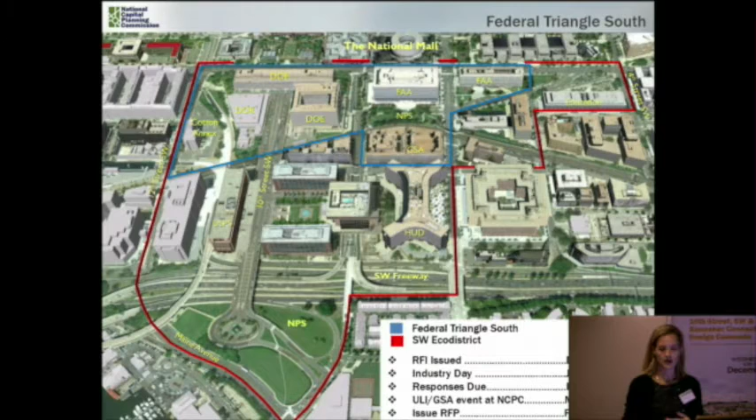Probably the big thing going on in the Eco District is GSA's work with Federal Triangle South. You may recall last December they issued the request for information looking at the land outlined in blue here, which is a good portion of the Southwest Eco District boundary outlined in red. They issued that RFI looking to redevelop or revitalize their federal property to meet their needs and their client agency needs, and also to meet some objectives of the Southwest Eco District Plan. We're anxiously awaiting the release of that RFP, which should be very soon now.

That's going to be a really important first step for the redevelopment of this area. We've been working closely with the DC Office of Planning and with GSA on the new zoning for the area defined by Federal Triangle South. That zoning has been proposed and is available for comment. I won't go into details, but what it does right now is look to figure out how to incentivize new streets in the area and residential development, both of which are very important to achieving the Southwest Eco District vision.

Then we have the Maryland Avenue Southwest Transportation Study. Shannon Hake is here if you have any specific questions for her, the project manager at DDOT. Basically, that's the study to look at the technical and financial feasibility of decking over Maryland Avenue. Right now we've had a bunch of interagency meetings, and there's been some public meetings, with another one coming up soon. They're looking at the alternatives to the small area plan right now and the traffic analysis, so more of that to come soon.

I want to mention the stormwater infrastructure study. Many of you might recall that we proposed a district water system for 10th Street and the parcels along it. We received a lot of great feedback on that proposal, people are very supportive of this idea, and what we wanted to do was take it a little further and study the technical and financial feasibility of actually making this happen. That study will be available hopefully by the end of this year on NCPC's website.

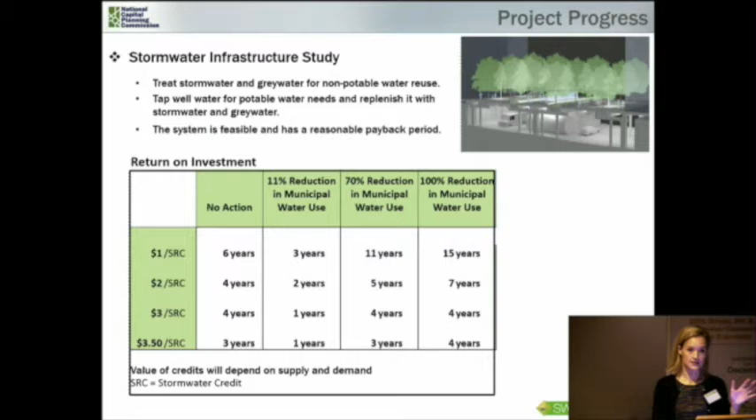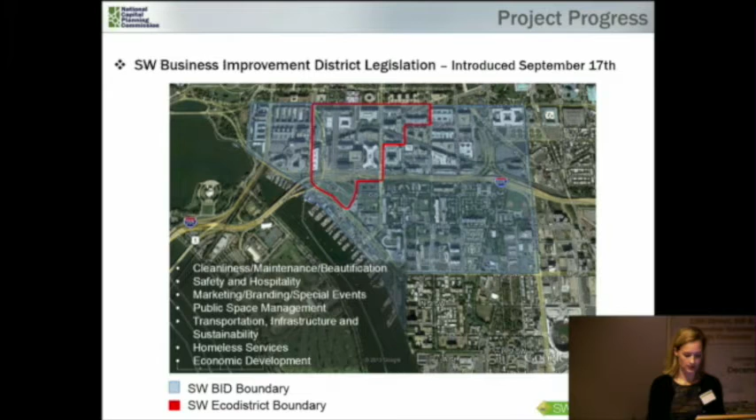They've been very supportive of this project and the entire Southwest Eco District plan, but are particularly interested in 10th Street and this interim connection at Banneker, and really starting to talk about some of the short-term improvements we can do on 10th Street. So we're very happy to have them involved, and couldn't be happier that they're going to be up and running soon.

Throughout this time, we've also been working closely with the Smithsonian, who is also working on a master plan for the southern portion of their property along the National Mall. This is really important for the connection at 10th Street and Independence. What they do at that intersection and on their property, and how that translates to moving across into the 10th Street corridor, is very important. So we'll be working with them throughout this upcoming year, which is very exciting.

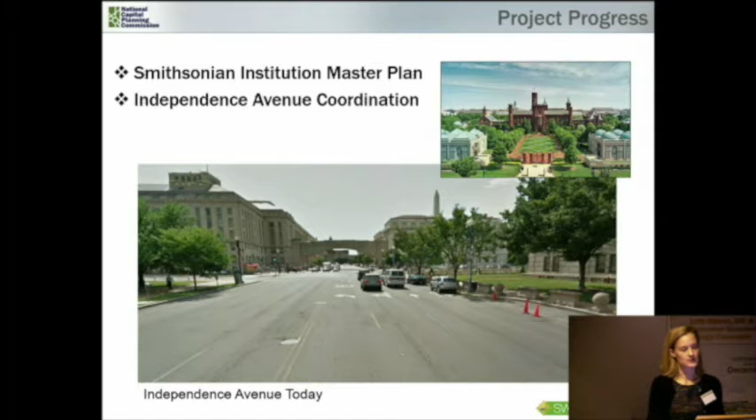As Marcel mentioned, we still continue to have very strong interest in new memorials and museums, such as the Benjamin Banneker Memorial and the American People's Museum, locating within the 10th Street corridor and at Banneker itself. So we were hopeful that we will see some sort of commemoration and new museums in this area as well in the near future.

So that brings me to where we are today. We're presenting these concepts. We have, since the last public meeting in May, been to CFA twice. We were at NCPC, and then we've pulled together our working group in the Southwest Eco District Task Force to review all of this work. We will be taking all of this to the National Capital Planning Commission as a concept in January, at the January Commission meeting. Then the two projects sort of diverge a little bit.

The 10th Street work will be put on hold until we can start working with the BID to do short-term improvements, and then the long-term improvements will happen as major redevelopment happens along 10th Street. But it's really important to have a concept in place to define not only the right-of-way for 10th Street as these properties potentially redevelop, but also to make sure that as they're redeveloping over a period of time, we're all trying to redevelop towards the same vision. So we will place that on hold for a little while until the big properties redevelop.

And then with Banneker, we will be taking that concept and handing it over to the National Park Service, who will then bring it through the actual design and review process in NEPA. That project is part of P.N. Hoffman's requirement for the wharf development project, and so that project does have funding, and we're really excited to see that come to fruition, and I know that the National Park Service is too.

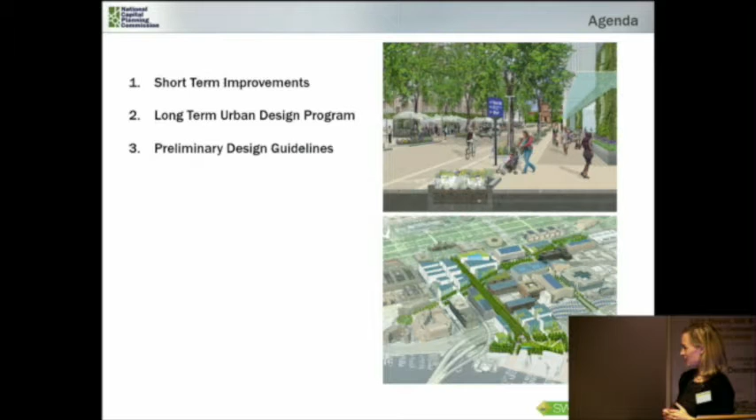So with that, I'd like to bring up Otto Condon with ZGF to talk about the design. Thanks, Diane. Good evening.

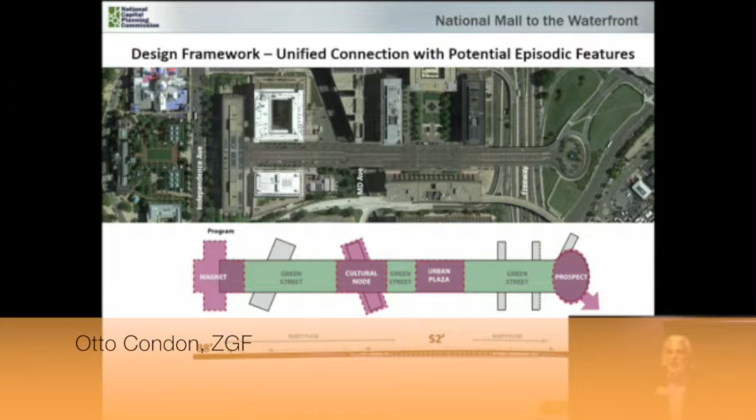So I first want to talk about the short-term improvements. If you were here at the last public meeting in May, we identified a framework, and we've really taken the feedback to develop a more refined programmatic concept. As Diane mentioned, the idea was really to come up with the framework for how all the development and all the various stakeholders can start to move both designs forward.

The design framework itself: we looked at 10th Street as a real unified connection with potential episodic features, what we call the magnet at Smithsonian, because we really need to attract people to come down 10th Street. There's the opportunity for Maryland Avenue to take on a more civic role, and then there could be a cultural node at that intersection. L'Enfant Plaza itself is really at the peak of 10th Street, which has about a 14-foot rise, and it peaks at L'Enfant Plaza and then goes back down to the river. That's a real opportunity for an urban plaza. Then moving down towards Banneker, which is really the prospect to look over the river.

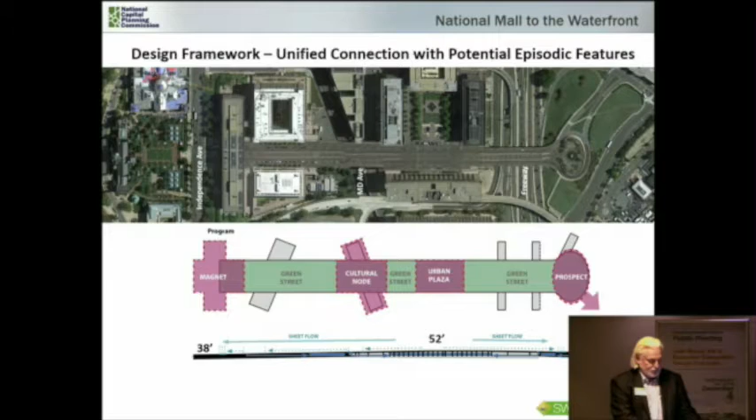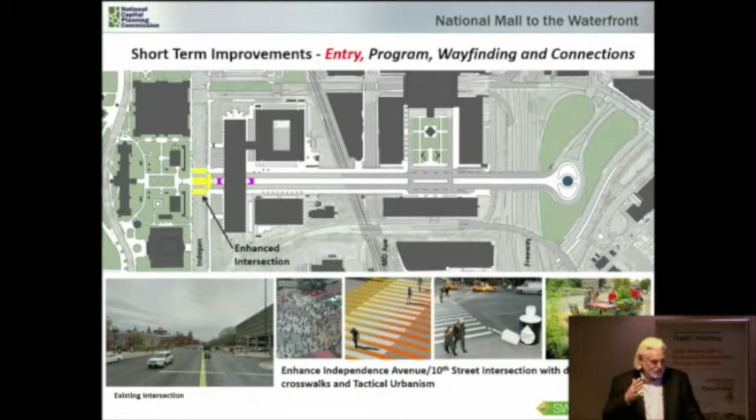In terms of short-term improvements, we wanted to break out the idea of entry and program, and then wayfinding and connection. The first thing for the entry is, in the short term, the intersection with and across the Smithsonian Garden. It's pretty much unidentifiable now, and with some simple tactical urbanism strategies, we could create more of an entry and gateway at that location, so people get a sense that the mall doesn't end at Independence.

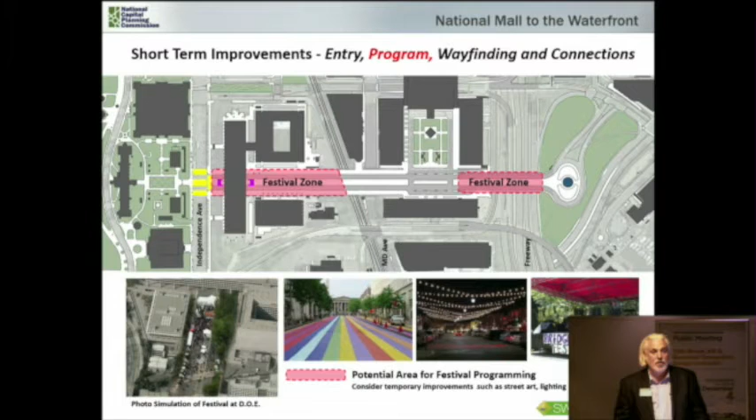We've been talking with the organizers of the BID, and if there's a way to expedite the process, it might be a way to move it forward and really start to create the energy for the area. With that, there could also be additional improvements like temporary art, lighting, and things such as stages.

In terms of wayfinding and connections, with the current configuration, there need to be improvements to the crosswalks, not only at Independence, but also at L'Enfant Plaza, to make that transition to the bridge structure, since there are really no sidewalks over the freeway.

And then to get down to the waterfront, to make both the future connection toward the Fish Market and also to 9th Street. We also think, from a traffic management and pedestrian safety standpoint, these little purple areas show opportunities for reconfiguring some of the streets, making them behave better with simple curb line improvements and enhanced intersections.

In terms of wayfinding, there's an opportunity for some innovative lighting and more innovative signage, just to get people to know that if you're at the Smithsonian, things don't end at Independence, and really start to draw people down.

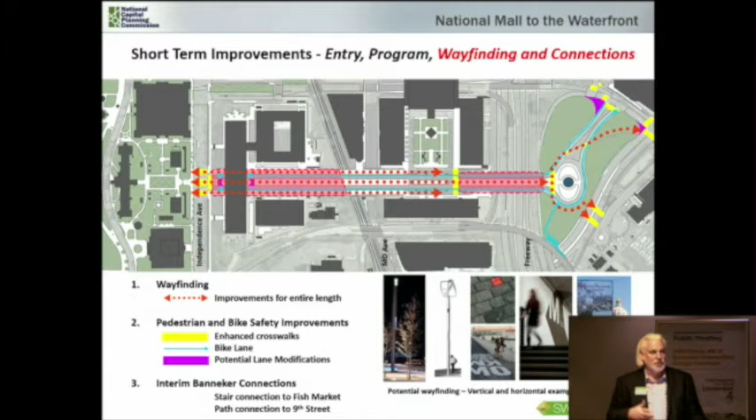So as part of the scope, the idea was to identify things that can be done quicker and easier and don't require large investments. And once, as Diane mentioned, the BID is established, maybe that's something that could start to occur in the more immediate future, maybe even 2014.

So the next is the interim connection for Banneker. If any of you were at the meeting, you'll recall we looked earlier at how to get down from... does this actually show up there? Oh, it does, okay. 10th Street, to make the connection across to the future waterfront development.

As part of the Southwest Ecodistrict Plan, there's a 100-foot corridor that is really the view corridor from Banneker down to the water. We were looking at how to fit the circulation improvements, the stairs and potential ramp, within that area. To put the stairs and ramp there, because of the grades, it didn't fit.

This scheme was trying to put the stairs in that zone and use the area to the west for the ramps. I think generally the feedback from the public meeting, from CFA and NCPC, was that this was trying to put too much stuff in a narrow corridor, and it didn't really do justice to the connection.

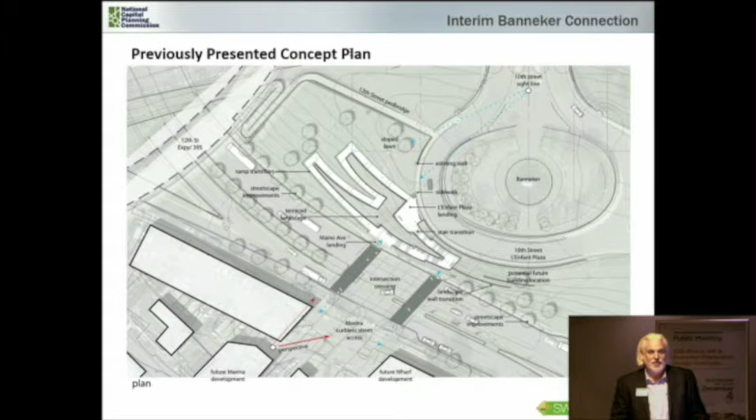This illustration actually starts to show that there's just a lot of additional walls being created—maybe more of a visual barrier.

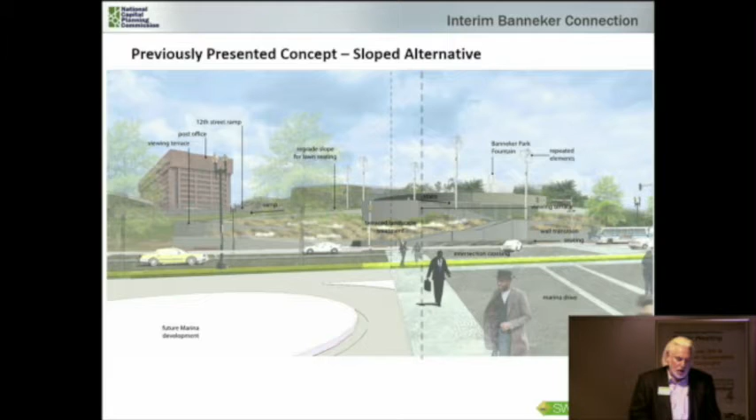So with all that feedback, we started to look at maybe there's a way to incorporate the stairs differently. The actual feedback we got was: don't try to put everything in that one zone.

Maybe we should look at the accessible route going down to 9th Street with some landscape improvements, as shown in this diagram, and really try to make the jumping-off point for the stairs at that intersection, using the existing break where the bike ramp is, then create a more gradual transition for the stairs. This was also based on understanding whether Banneker is a historic structure, since the previous scheme required more modifications to the walls, which would require more review of the historic nature.

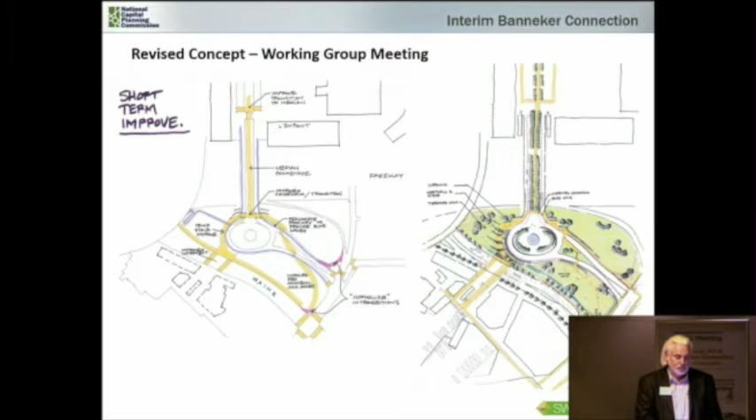This one is a little more sensitive to its current status until it's figured out. Here's a close-up showing if you're coming down the center median, improved crosswalks. We've widened the edges and made some transition plazas so it accommodates accessibility and curb ramps. A little more seating areas along that edge, and brought the stair entry off the existing where the bike path comes in, using more of a terraced step approach that is radial with Banneker, pulled away so we had enough area to create a few

Transition zones to accommodate the grades. On this side, these are the existing crosswalks, and with the slopes, in order to get 5% or less so that it meets ADA requirements, we think it's an opportunity to provide both the ADA path on this side, and an enhanced connection with some landscaping along the path. Ultimately, this whole site could be redeveloped in the long term with museums and such, and at that point the buildings can be used to accommodate some of the vertical circulation.

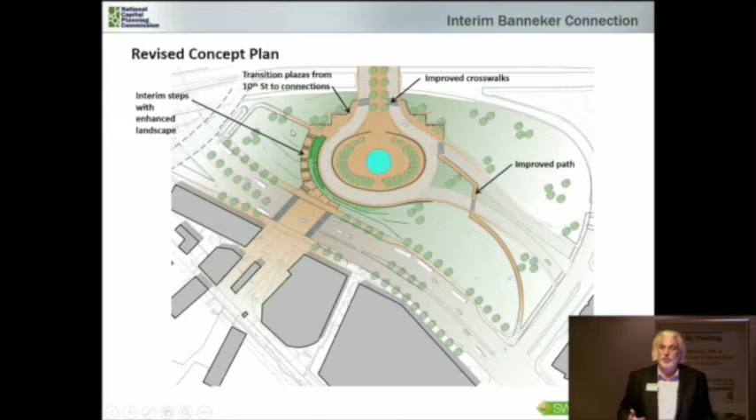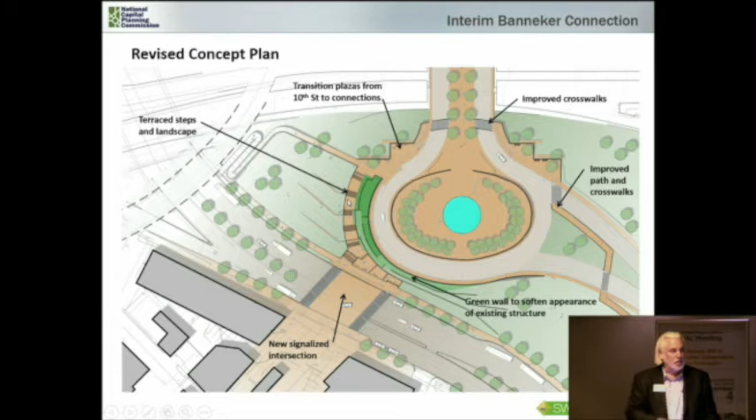This is just a close-up showing the new intersection being built as part of the waterfront development, and the steps with some of the grades tied back, or the retaining walls tied back into the grades, to create some landscape terraces and a more generous approach for the stairs. Then in perspective, this is an opportunity, by stretching the stairs out, to really incorporate the landscape more. We still need to do a lot of work on understanding some of the structure of this wall.

This is what I'll call the Pringle wall, which is next to the Banneker fountain—it's kind of shaped like a Pringle. Then this wall is the wall that's the road, and we still need to better understand the structure and how much we can pull some of the soil away. But it's an opportunity for some green walls, and a few intermittent walls for stepping up the landscape.

As part of the next and final wrap-up, some of the comments we received were about how we make these walls a little more generous in the curve so that it's a little more sympathetic to Banneker itself. Here are the stairs which come down to the new intersection, and because of the grades, it's an opportunity to create some terracing and maybe even a temporary sculpture garden to start to activate the space.

This just shows some images of how we can really soften the walls up with green wall technology.

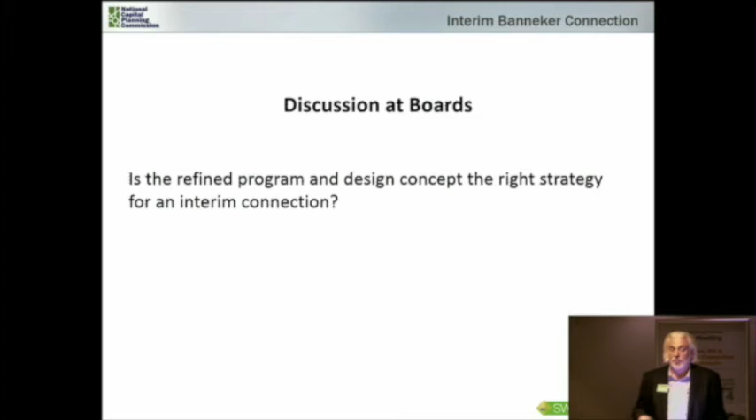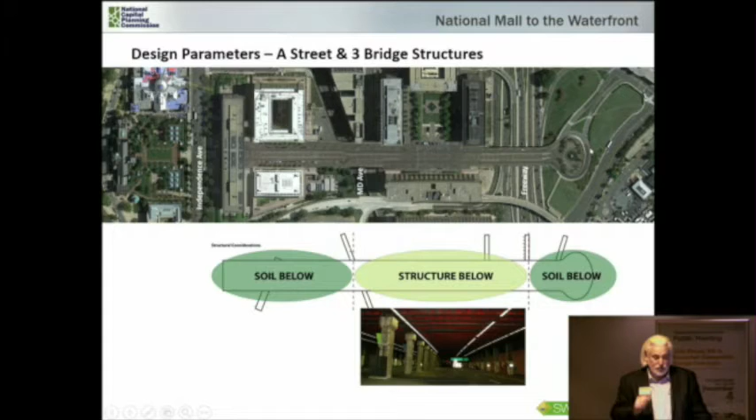So as part of our study, we really wanted to understand—the drive was to make a green connection. Putting trees on a bridge with the structure can get complicated in terms of making sure there's enough soil for the trees. So that was one of the first things we showed previously, making sure the programmatic concept was achievable and feasible. This diagram starts to show that the bridge actually changes span direction, so trying to get some sort of rhythm within the various structures is a challenge, but we think it's doable.

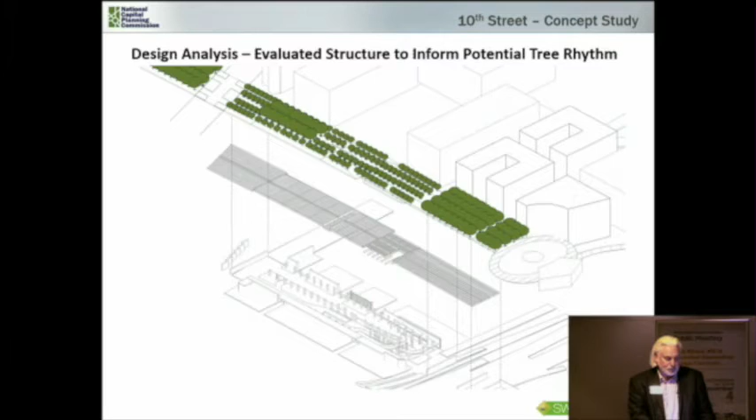Last time we presented 3 design approaches, and it was really to get feedback on what are the priorities for all the agencies, the stakeholders, the public, in terms of the feel of the street.

We had the hardscape approach, which is really probably closest to the current experience, but with some trees. Then the softscape approach, which is more of a linear garden, maybe more reflective of the mall. And finally the waterscape, which was part of our water study, how can we collect the water, how do we use it, how do we clean it, how does it enhance the environment.

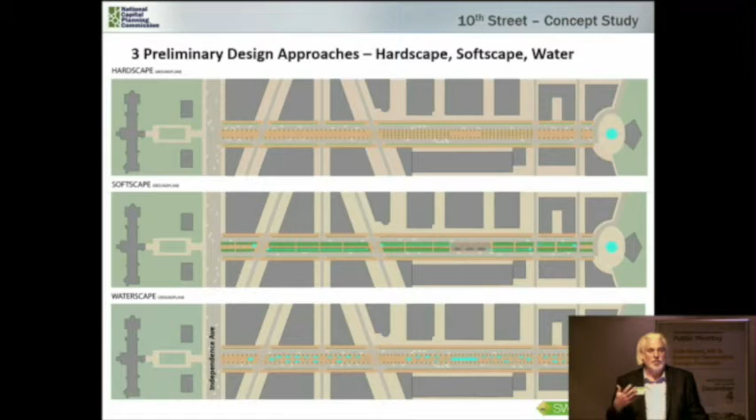So these were the realm of options. And as Diane mentioned, we went through several meetings and got some really great feedback and an understanding of the priorities in order to move this forward to a framework that can be further carried as all the projects and the bid starts, and the agencies help guide the more detailed design.

In terms of the right-of-way, since that's one of the most critical things for the Federal Triangle South RFP, the current right-of-way is 150. We looked at narrowing it, expanding it, but the 150 actually seemed like the right dimension. The current street configuration has a 29-foot sidewalk, 39-foot median, and a 29-foot sidewalk on the other side, with roads that are 26.5 feet.

If you recall, in the Southwest study, we did look at alternative configurations, whether it was a median down the middle, the road down the middle, or asymmetric. And again, from what's the best idea for the street that's flexible and actually achievable, we decided that keeping the center median was the best idea.

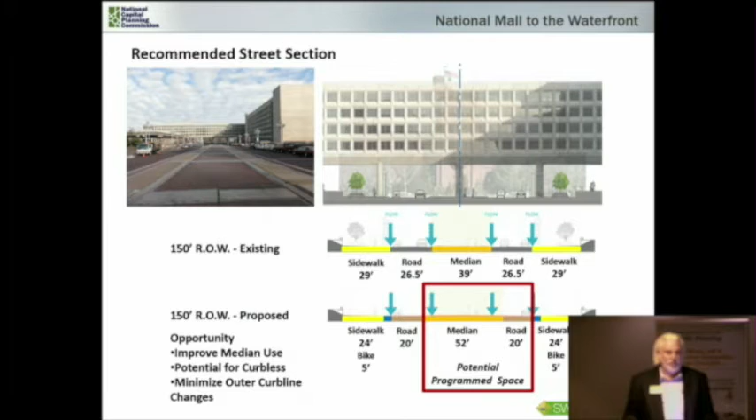It was an opportunity for making a curbless environment. We put the asphalt on a diet and turned it into a 20-foot road, which would accommodate 1 travel lane and 8-foot parking, which gave us a median width of 52 feet versus 39, which actually gives you room for landscape and room for programming.

And the 20-foot roadway gives you an opportunity, if you do a festival, to actually turn 1 parking lane and 1 travel lane into 2 travel lanes at key times.

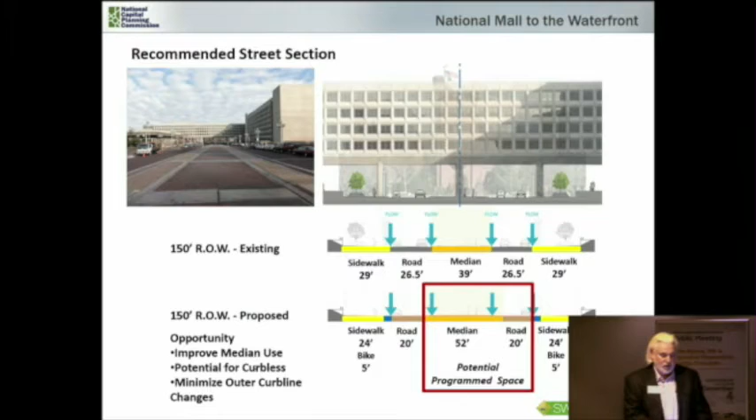So there's an opportunity for occupying the street and really bringing people the whole length.

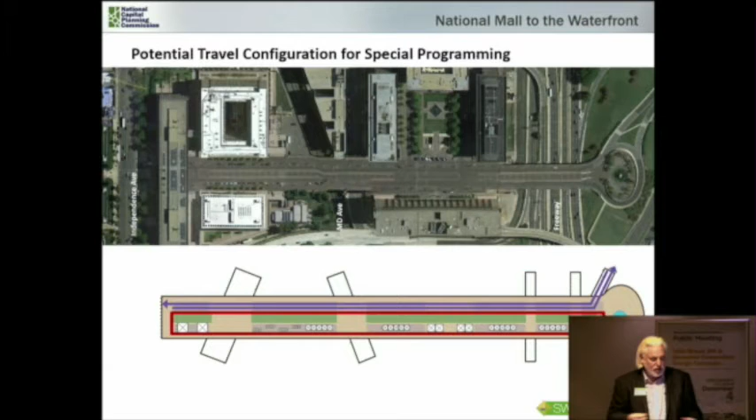In terms of how do we maximize the tree canopy, there was no way to actually have a full tree canopy along the whole length because of the bridge structures. So we're looking at where there's dirt, let's utilize the dirt to get the maximum tree growth.

Also an opportunity for a cistern for collecting the stormwater, which could be used for building gray water systems, irrigation.

In terms of the stormwater plan, the idea of these cisterns, our initial findings are a size that's slightly less than the cisterns that were put in the mall. So we think it's actually very achievable and feasible for the size of cisterns.

In the areas of the bridge structure where there's an opportunity, because there's nothing happening basically below that area, we could cut into the bridge spans and create areas for larger trees and also a cistern.

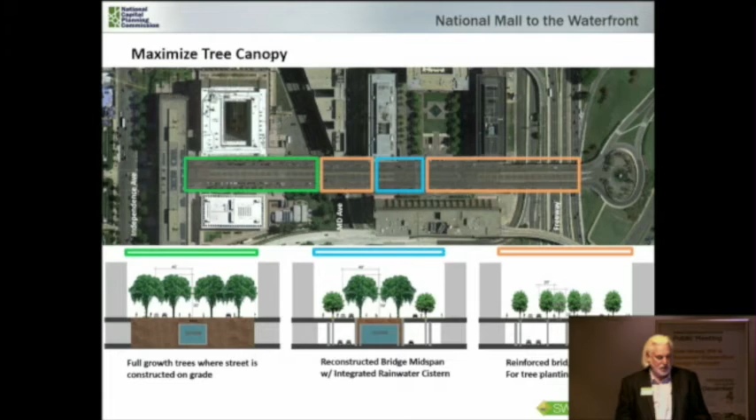We think there's an opportunity for doing heat exchange, basically similar to geothermal, using that heat, the mass of the water, for buildings. In terms of quantities, the water on the street might be about 100,000 gallons.

The cistern might be in the 500,000 to 700,000 gallon range, which is comparable to the mall size. So that's the kind of program we're looking at and that we've been pricing out as part of the stormwater study and trying to illustrate in these concepts.

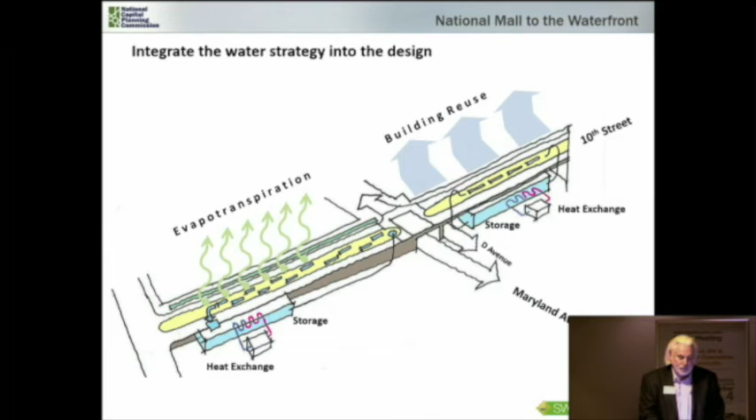After we presented those three approaches, a lot of the feedback we got was that the program was understood, but let's talk now about the experience. So we started calling it more of an urban garden promenade, that it can change experience, build upon what's underneath, and reflect the structure, but also create unique areas.

We should take advantage of the grade up to the plaza. As a diagram, coming from the Smithsonian up to Maryland, it's a little more of a passive green because we can get more landscape there. That's more open as a feature near L'Enfant. Then the landscape water furnishings can create more of a cascade, a little more organic and less rigorous as it connects down to the waterfront, creating the final prospect down to the river.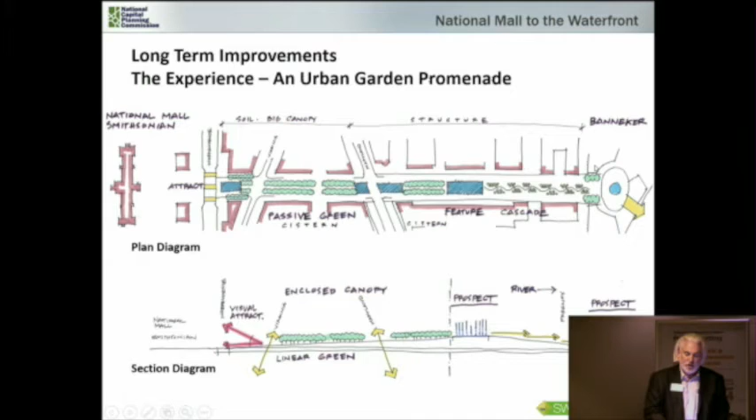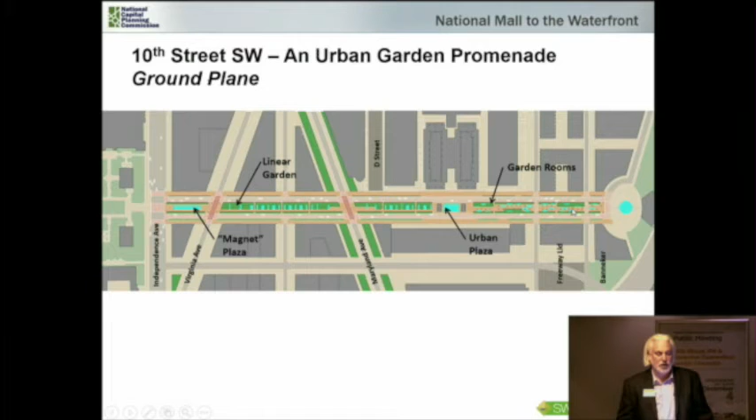In the ground plane diagram, it's a little more open at Independence, with opportunity for a water feature, then the Magnet Plaza, a little more green with some integrated water toward Maryland, opening up more at the Urban Plaza, and then a bit more of a staccato approach. We'll still maintain some of the rhythm of the trees so you get that sense, but it's a little more playful as you move down toward the river.

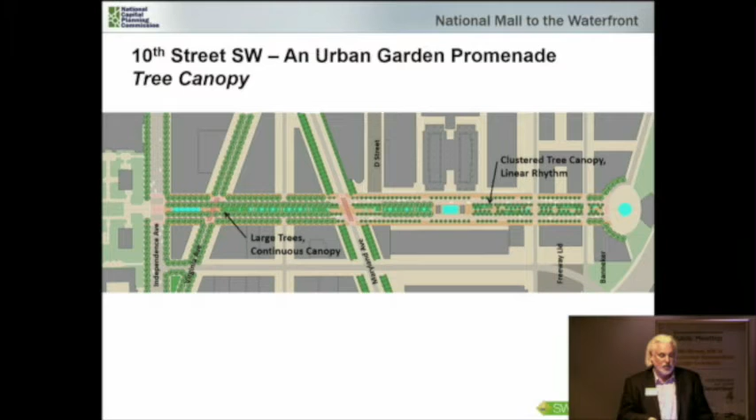This gives a sense of the rhythm of the trees and the general size we think we might be able to achieve in terms of overall canopy. It still maintains the rhythm, but provides opportunities for bringing sun where you want sun, while also providing shade.

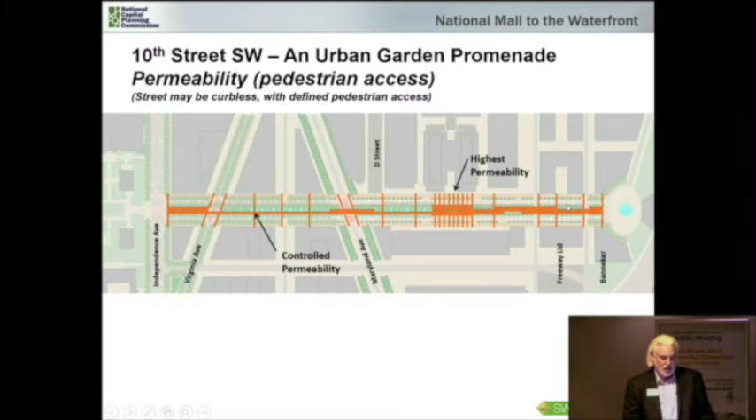In terms of permeability for the length of the area, at Independence this is probably most like an urban plaza complementing the garden. It may be a bit more mid-block with crosswalks up to Maryland. When you get to the urban plaza, it's as permeable as possible, a curbless environment. And there may be more opportunities for programming down over the freeway as the freeway gets redeveloped.

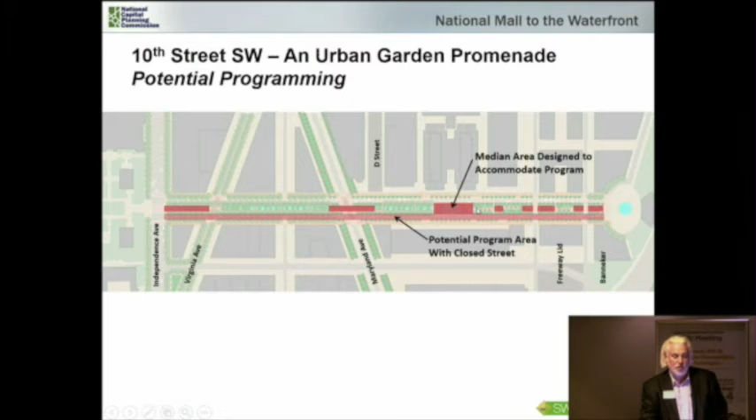In terms of programming, it reflects the layout with the possibility to use the whole street, whether this side or the other, and making sure there are opportunities for programming larger areas at each of the nodes.

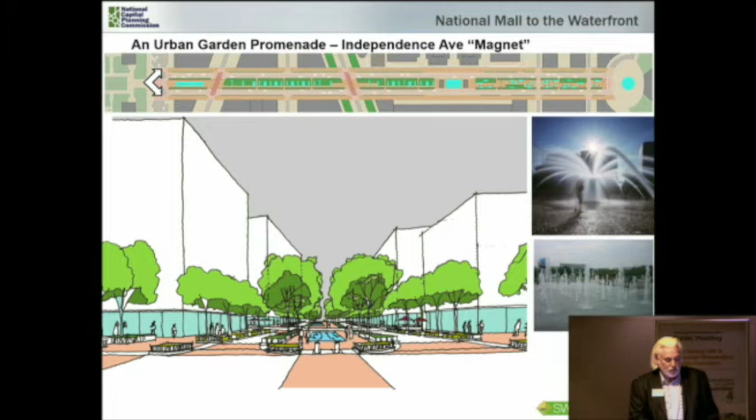In terms of walking down the street, here's what it might look like coming in from Independence, crossing the garden at the Smithsonian. The area right in the median is an opportunity for a water feature that could be turned on and off. Here we're showing some vertical opportunities, but with programming it could really start to draw people in.

For the linear garden, we looked at an asymmetric approach to create a little more green on the east side of the street for better sun, shading, and opportunities for incorporating some water features. With the grades, this may be a bit more extreme, but Meridian Hill Park is an example, and here's Millennium Park in Chicago. We think there are opportunities to really use water as an architectural landscape feature to complement the space, while still creating a little vertical element too.

As we move forward, we're going to write up guidelines and design parameters for the framework, so that as the design moves forward it can be developed to a level of quality and detail to be considered for the whole street.

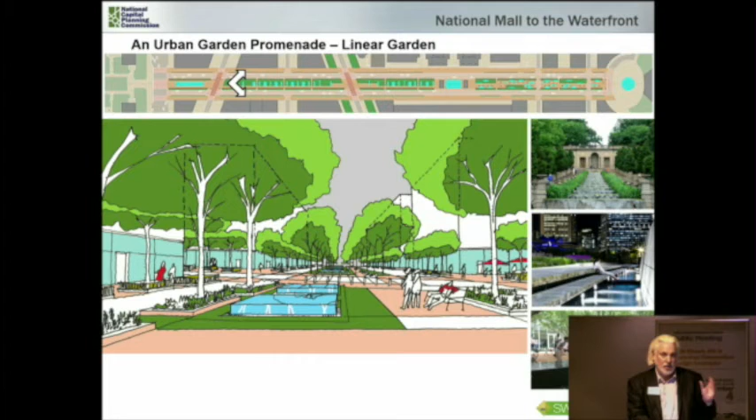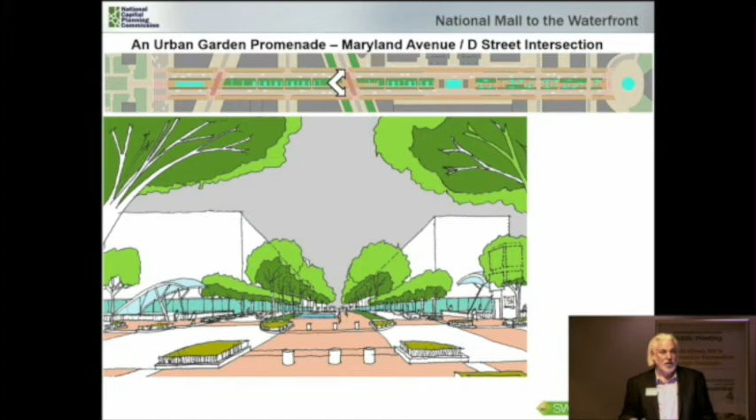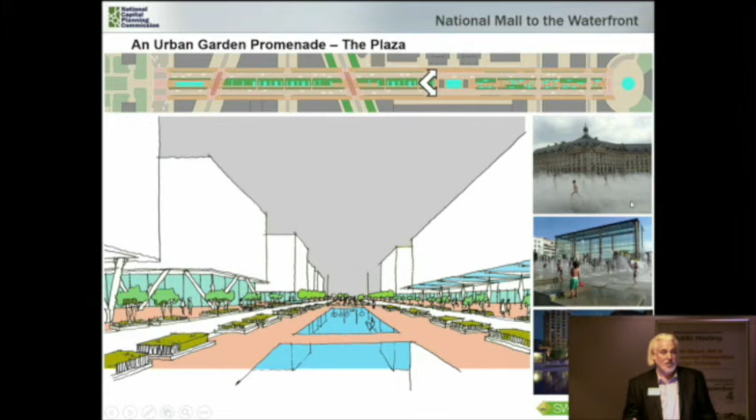At Maryland Avenue, part of the idea is that it should be open, reinforcing the civic nature of Maryland Avenue, and also because there should be opportunities for vertical connections down to D Street, since that's one of the ways to get to the metro on the east side of 10th Street. The plaza itself should be more open, with opportunities for enlivening the edge of the post office building with some structures. With the potential future development at L'Enfant Plaza, the plaza itself should be of a quality that makes it interactive in terms of touching the water.

The ideas themselves, we haven't developed as much, we looked at the 150-foot dimension, actually a little bit more. At that scale, there's an opportunity to do a framed water feature in the median, similar to Millennium Park, or maybe more of an architectural feature in the median. This is actually a park in Portland that we designed with Olin, which has both a fountain and some architectural features.

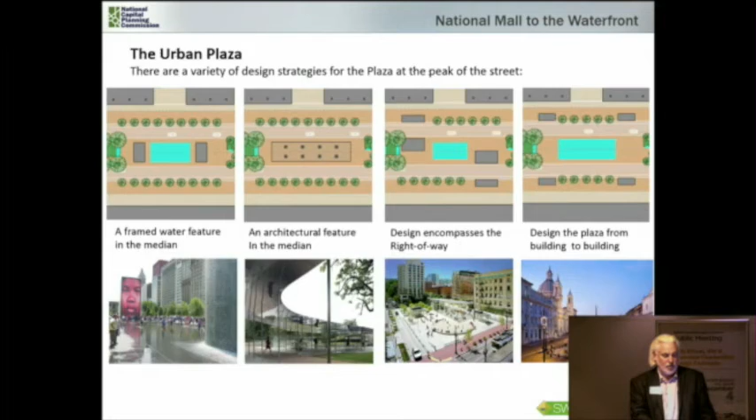Finally, as you're moving down the linear garden aspect between the plaza and the river, there are opportunities to be a little bit more informal—raised planters because of the bridge, seating, water features, smaller trees but clustered to create a little bit more variety. This starts to show some actual water features.

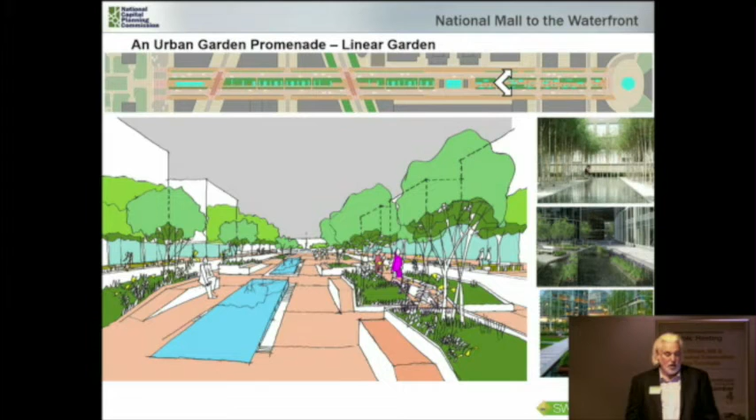These are down by Washington Circle, right by GW, just built. They're actually part of an apartment building, but they would function structurally the same way. They have the water feature and a cistern below, and it recirculates the water to keep it active and not stagnant. I think that's an opportunity where your areas are limited because you're over the circulation of the lower street.

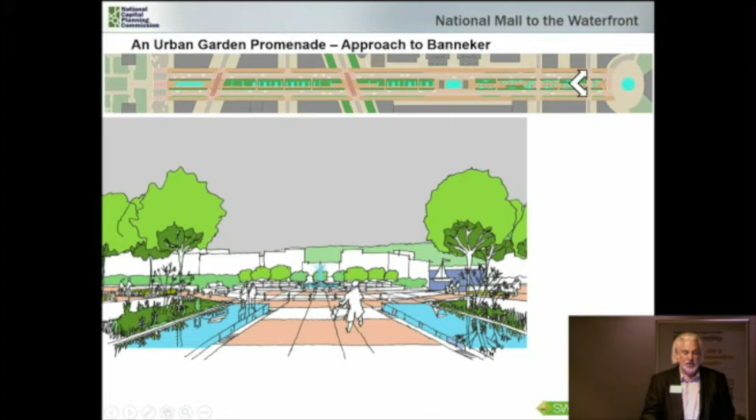And then finally, getting to the approach to Banneker. Here we're showing pretty much where it is now, because there's still a lot to be worked out with what the future of Banneker might be. In terms of long term, we still think it's going to be developed in phases, with Federal Triangle South being one phase. When Maryland is capped, that's going to be a project in itself. L'Enfant Plaza is an opportunity for the private development adjacent to it, and also how to activate the post office. The freeway, maybe long term, is when the freeway gets capped for some development. And then finally, Banneker.

So I think it's critical, and this is for your comments too—we're looking for a programmatic concept. We need to have it defined enough so that even though this is built in phases, it's a concept that's clear enough that when it's all said and done, it'll actually read as something that had a big idea behind it. It wasn't just—you don't walk down and go, oh yeah, this was the 70s, this was the 80s, well maybe 2020, maybe 2030, that sort of approach.

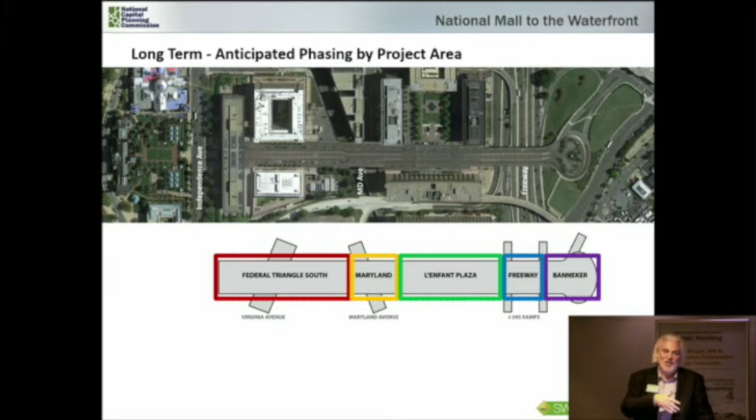So for the discussion, I guess we want to talk about: does this seem like the right framework for 10th Street in terms of the program and ideas, or is this the right approach in order to address both the short term and the long term?

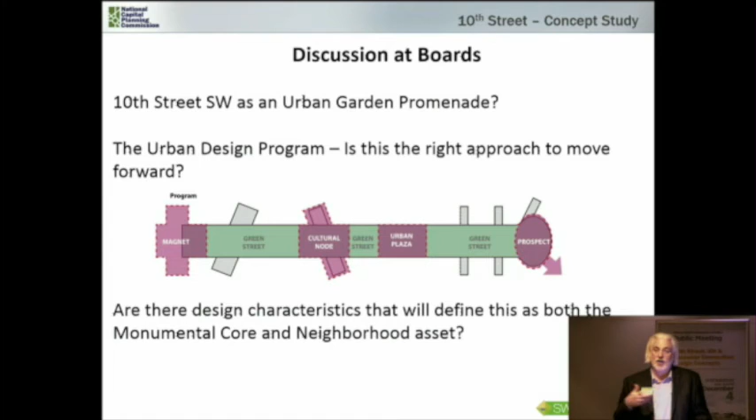One of the things we've had some discussion about is the design characteristics. Right now, 10th Street is a period piece with the circular globe lights—some people radically love them, and some people, I'd say, radically dislike them. That's just one example of how furnishings can create a strong identity. So what we'd like feedback on is not only the character of the street, but what its role is, both as a monumental core street and also a neighborhood amenity.

And with that, I'll turn it back to Diane.

Okay, so the last part of this evening's presentation, before I'll get to go talk over at the boards, is I wanted to just introduce you to what we are doing with regards to forwarding the Southwest Ecodistrict Plan beyond the design for 10th Street and Banneker. One of the action items in that plan was to synthesize the objectives and design strategies into a very cohesive document, which we're calling right now the design guidelines, so that they're all in one place—so when Federal Triangle South moves forward, you can look at them without reading about the background history and all the other stuff within the Southwest Ecodistrict Plan.

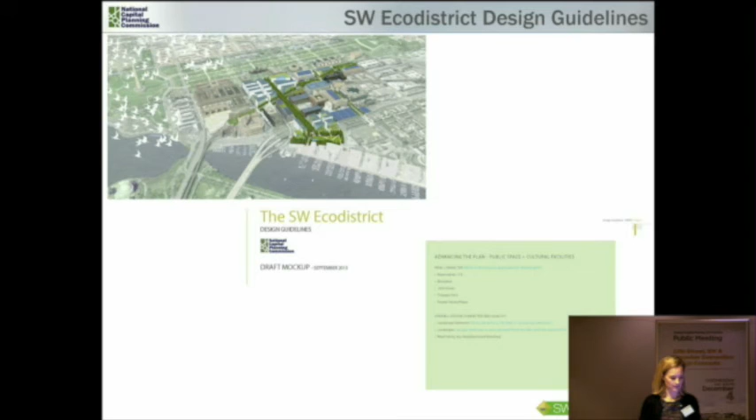We realized we missed some stuff when we did that plan, and this is an opportunity for us to advance some of our thinking. We're not doing a whole new plan, but there are a couple of key places I wanted to introduce you to. We don't have the answers right now, but we feel we can advance this to further define how we can bridge the national and the local city here.

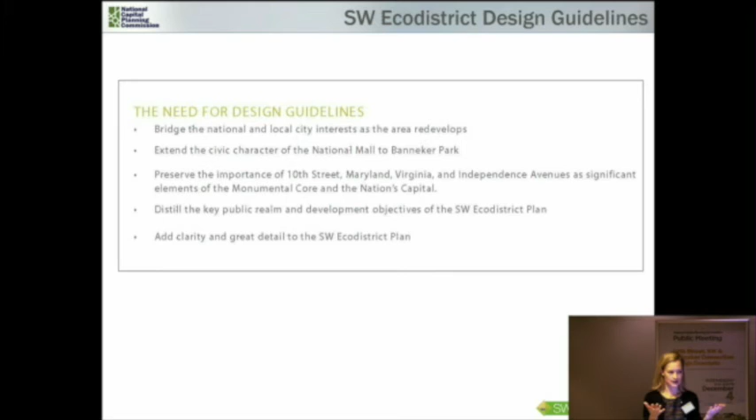As Marcel mentioned earlier, this is a really unique place with the monumental core and hopefully a very vibrant new neighborhood, probably more unique than any other place in the city. It really could be amazing. This won't be a regulatory document, just guidelines, but we think it will be very helpful, and it will build on a lot of the resources you see here. We'll have more opportunity to comment on them.

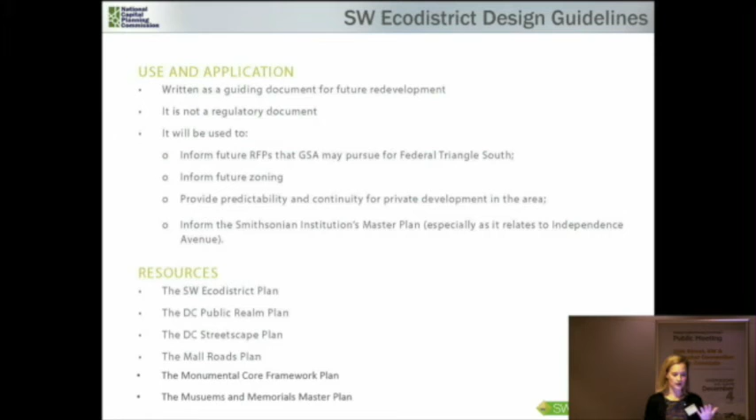Some of the things we're looking at are street classifications, building form and scale, park character and function, and the character of hardscape and landscape. I wanted to bring you up to speed because 10th Street is part of this, and certainly Independence Avenue as well, on what some of our initial thinking is. This is also important to how we comment on the new zoning for this area, which is open for public comment right now.

So actually, Otto and I are going to tag team this.

Right now it's a super block, and there's very minimal streets that aren't really defined. Part of the Southwest Ecodistrict Plan was to start to organize it, first by breaking up the super blocks, introducing new streets, and creating classifications by monumental, civic, or city.

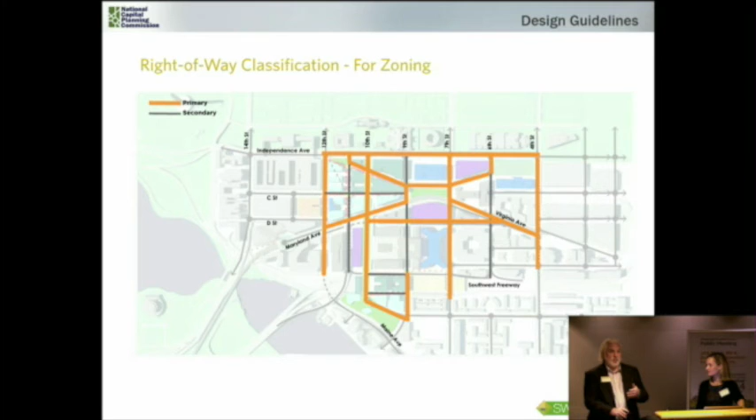This was a more functional approach, so it could be coordinated with the Office of Planning, Zoning, and the Department of Transportation's requirements for loading and such. This was really about identifying the primary streets, the most important streets where you want to walk, where the retail or active store frontage wants to be, versus the secondary streets, where you want your back-of-door stuff, loading for cars, garbage, and general loading.

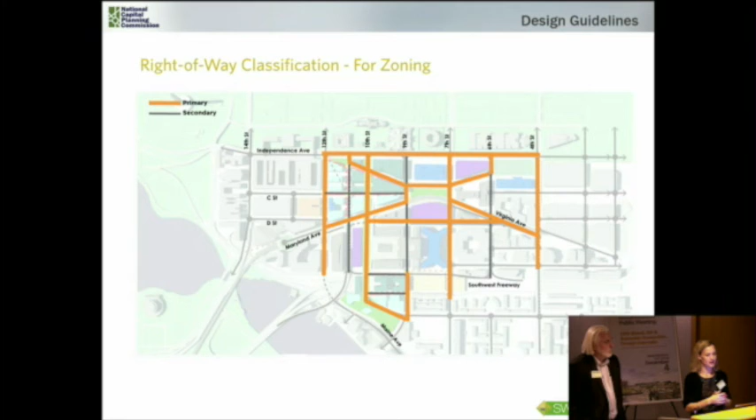We wanted to make a real simple diagram showing how to organize the streets, with the primary streets being Independence Avenue, Maryland Avenue, 10th Street, and Virginia Avenue. We also have handouts here when we finish, a matrix of street dimensions and the character of the streets, that you're more than welcome to take with you.

This diagram shows the primary streets where you want the active building frontage, which includes guidelines for what uses should be on the ground floor, how lobbies are oriented, how you may have displays or retail, and what the first floor height should be so you get a real sense of the frontage. Transparency, often you aim for about 75% transparency in the facade so it feels like you get eyes on the street. And then the building entries themselves.

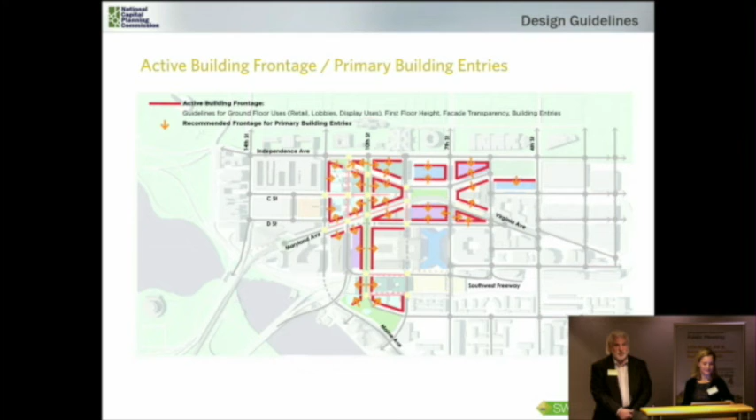So here, understanding the active building frontage is also the recommended frontage for primary building entries. The entry should be facing the parks, facing the grand streets, to help reinforce the character.

To complement that is the secondary frontage, where you would want to put the parking, the service, and the loading access. If you think of the super blocks, what you're doing is breaking them up, creating secondary streets, and funneling the loading and access into those secondary streets.

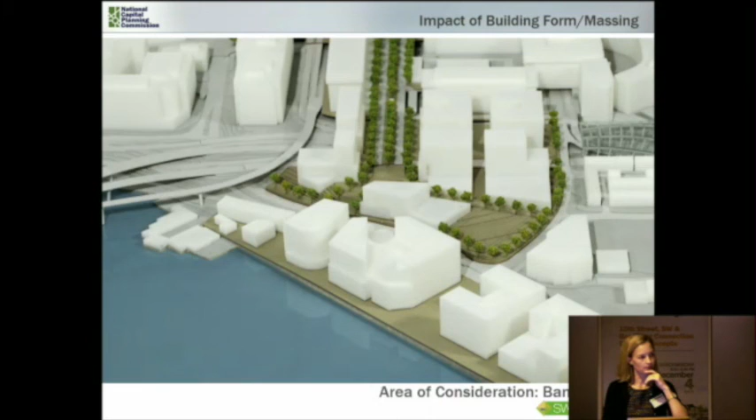So we will be drafting recommendations. These are draft, but they talk about respecting all of those views we just went through, and respecting the residential neighborhood across from Banneker Park as well. We don't know exactly what that means yet, except that we recognize there are important views and institutions on the National Mall that have a certain prominence.

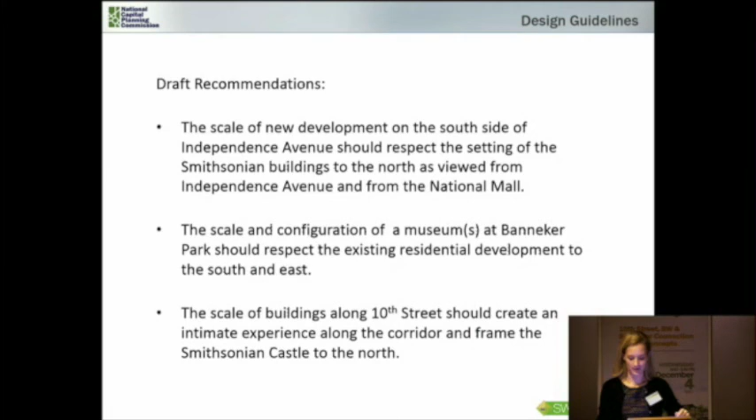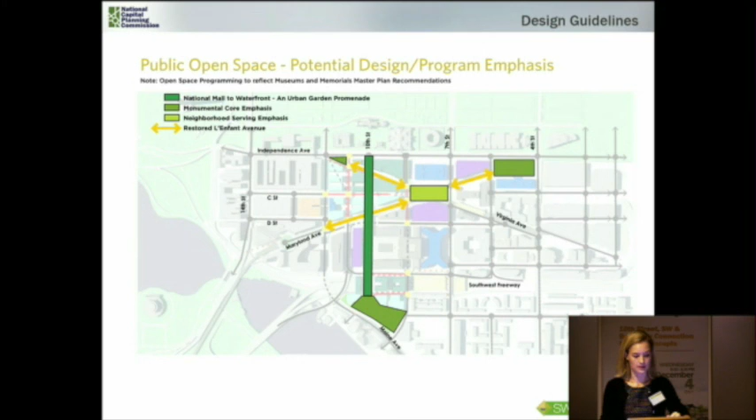It could be multiple museums, but that's very different from the character we see at Reservation 113, which we see more as a neighborhood park. One of the things we'd love to hear from you tonight is what would make this a much better neighborhood in terms of those parks and reservations.

So Banneker should have a more monumental character, whereas Reservation 113 might have more of a neighborhood feel. Otto addressed this well, talking about the elements — we want these to be timeless, incorporating new and more traditional qualities, but articulating exactly what that means is difficult.